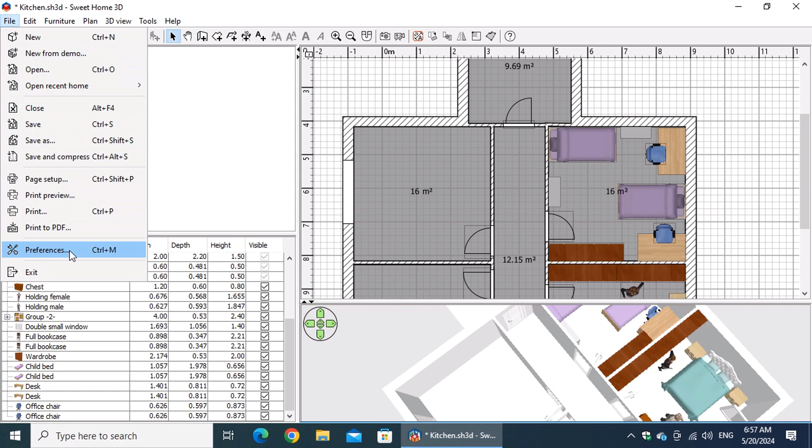In this lesson, we'll delve into the kitchen design created by Peter. Peter's vision is a kitchen space measuring 4 meters by 4 meters.

As we embark on the planning process, 2 key aspects will be our guiding light. We'll assess whether the 16 square meter space offers sufficient legroom to comfortably fit all the essential kitchen elements and allow for smooth movement within the kitchen.

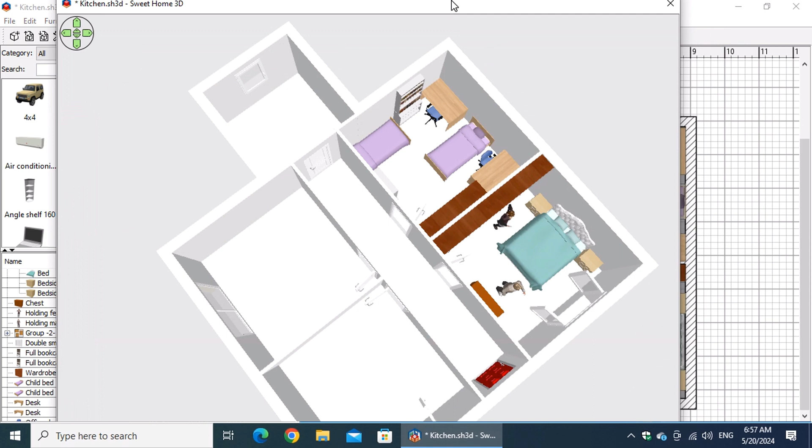We'll strategically place key appliances and fixtures like the oven hob, sink, dishwasher, and refrigerator. Choosing their specific locations is crucial, as it dictates the layout for plumbing and electrical installations. We'll also closely examine the ergonomics of the furniture layout, ensuring ample space for movement and food preparation.

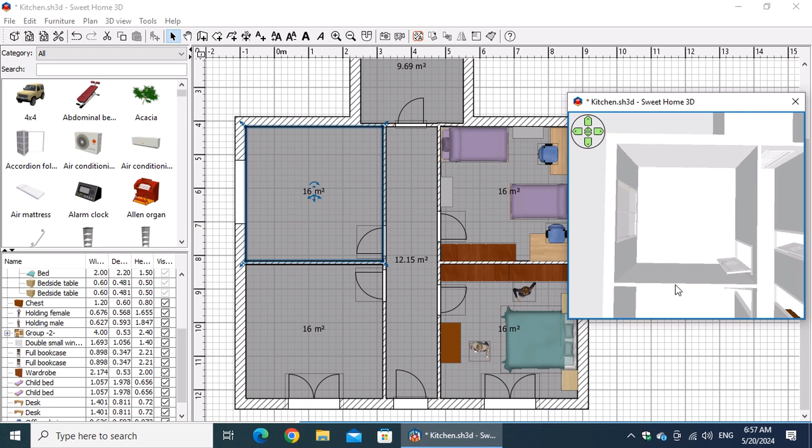By meticulously considering these important factors, we can design a kitchen that is not only functional but also enjoyable to use. If you downloaded the Creators Collection from the official Sweet Home 3D website as we explored in a previous lesson, you'll be greeted by a treasure trove of kitchen essentials. It goes far beyond just cabinets, ovens, and dishwashers.

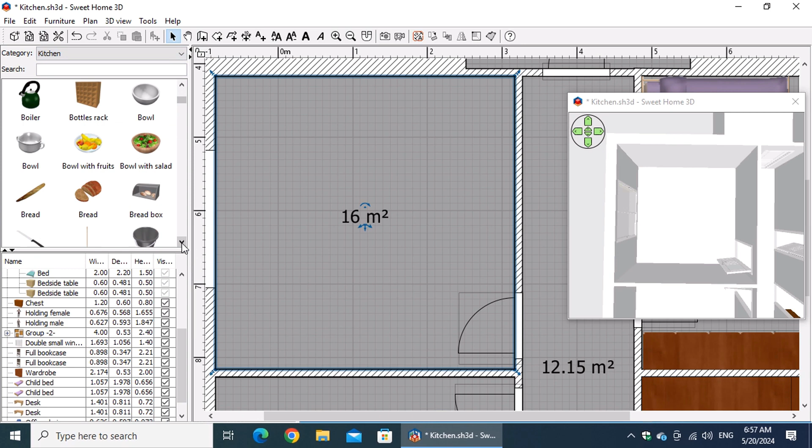Think of it as a virtual chef's paradise. You'll find everything you need to stock your digital kitchen, from essential tools like knives and pots to finishing touches - think forks, spoons, bread, and even mouth-watering pizzas and fries.

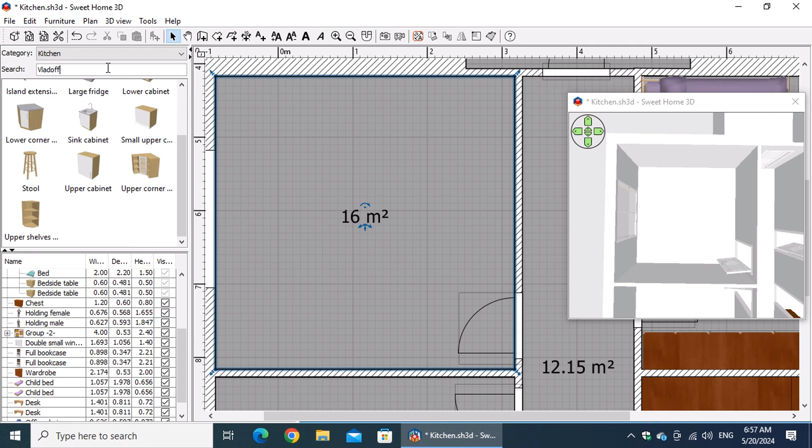To bring this to life in Sweet Home 3D, we'll strategically place furniture starting from the upper right corner. Before we begin, let's ensure that magnetism is enabled. First, we'll introduce the lower corner cabinet, followed by the upper corner cabinet, forming the foundation of the L shape.

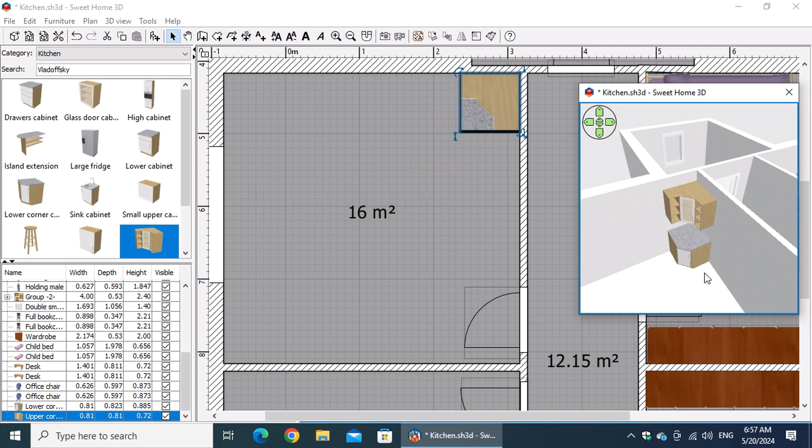We advance by positioning a lower cabinet atop the upper wall, earmarked for our built-in dishwasher. With a double click, we adjust its width to a fitting 45 centimeters. Continuing forward, we introduce 2 sink cabinets into the arrangement.

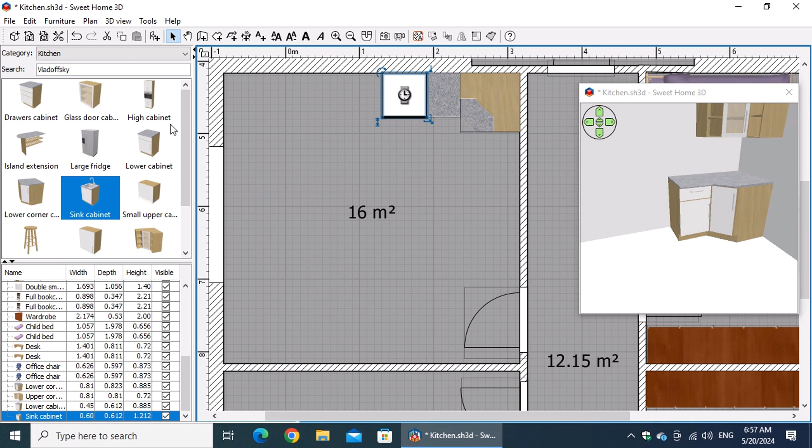Activating the Select Object in Plan button, we double-click on the left sink cabinet. In the Modify Furniture window, we choose Mirrored Shape and confirm by pressing OK.

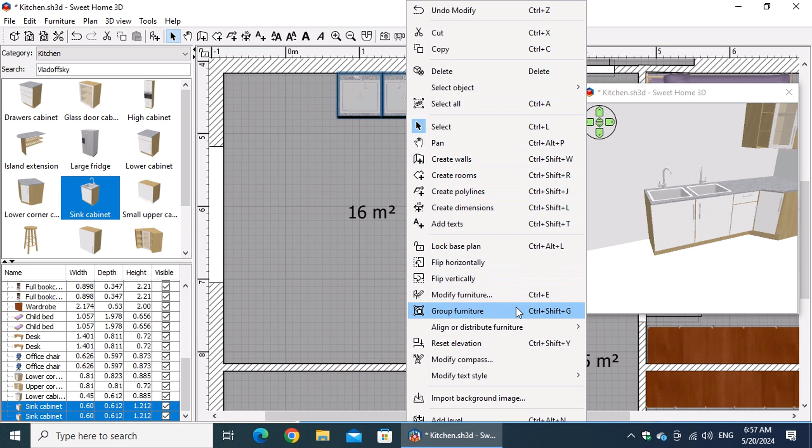Next, we select both sink cabinets, right-click on one, and opt for Group Furniture from the appearing menu. If necessary, we deselect any unwanted selections and then double-click on the grouped object. Finally, within the Modify Furniture window, we adjust the width to precisely 90 centimeters.

On the left side, we arrange a drawers cabinet, alongside a tall cabinet housing the oven at bench height. Elevating the oven to this level not only enhances accessibility, sparing users from bending or stooping, but also contributes to a unified and sleek aesthetic within the kitchen space.

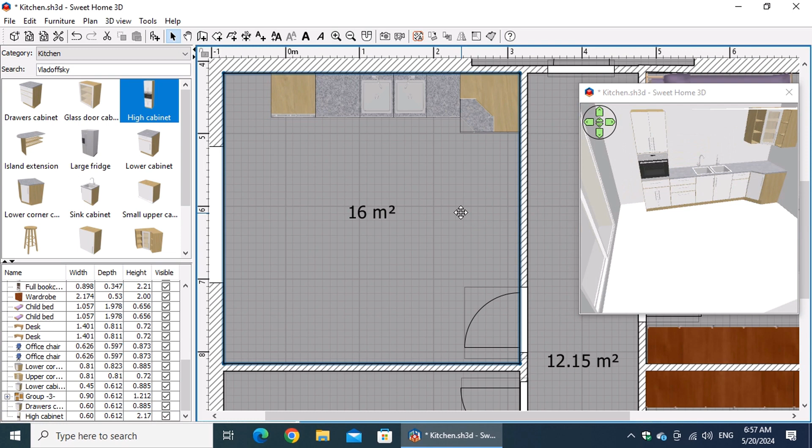This design choice not only prioritizes convenience but also fosters a harmonious integration, particularly when paired with other built-in appliances such as the dishwasher or refrigerator.

Let's continue by positioning the cabinets starting from the door side of the room. Place a drawers cabinet followed by a lower cabinet. Next, let's search for a fridge and position it at the far end of the right corner.

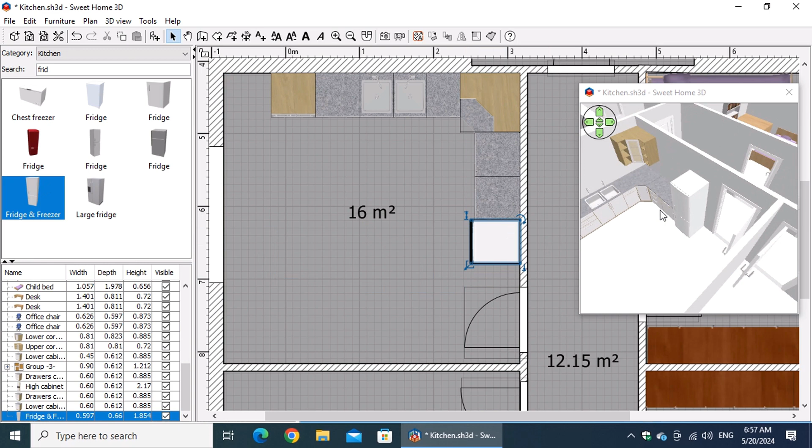To incorporate the upper cabinets, let's begin from the left corner. Position an upper cabinet, then double-click on it. In the Modify Furniture window, adjust the width to 45 centimeters. Once done, carefully position the cabinet on the left side of the corner.

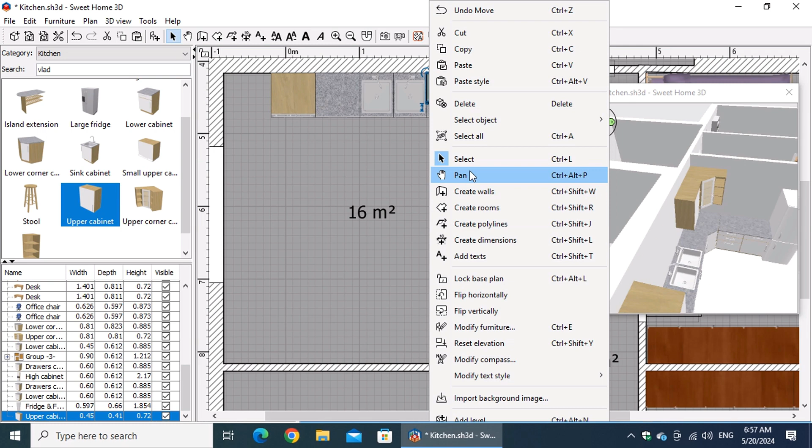Above the sink, we'll install 2 upper cabinets. Double-click on the right cabinet, and in the Modify Furniture window, select Mirrored Shape.

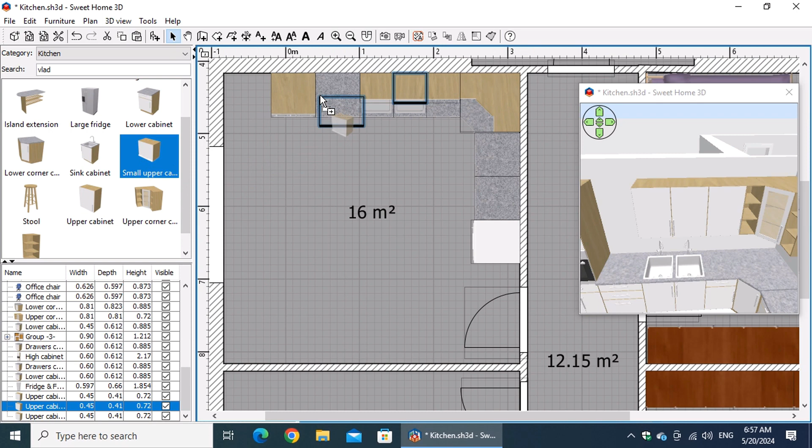Then, we'll add a small upper cabinet equipped with an extractor hood at its base. On the right side of the room, let's install 2 upper cabinets.

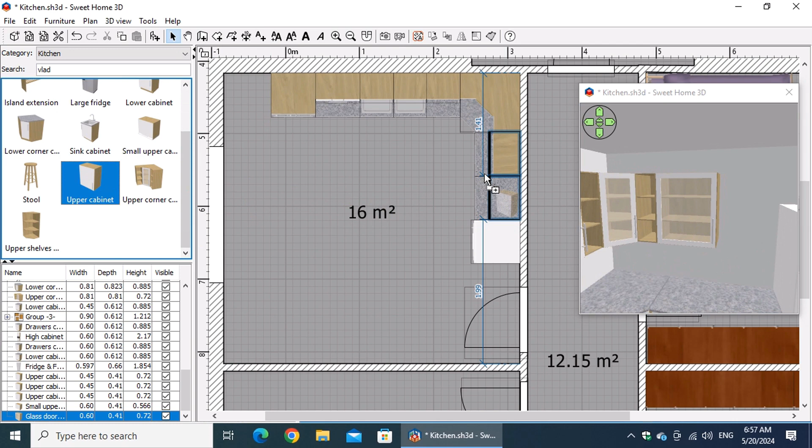In the search box, begin typing 'hob', then select the induction cooker. Place it on the right side of the oven, on the bench. The elevation of the induction cooker will automatically adjust to match the height of the bench.

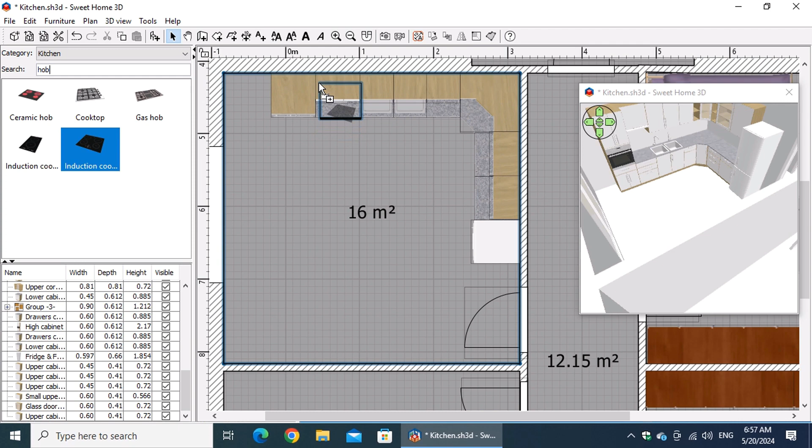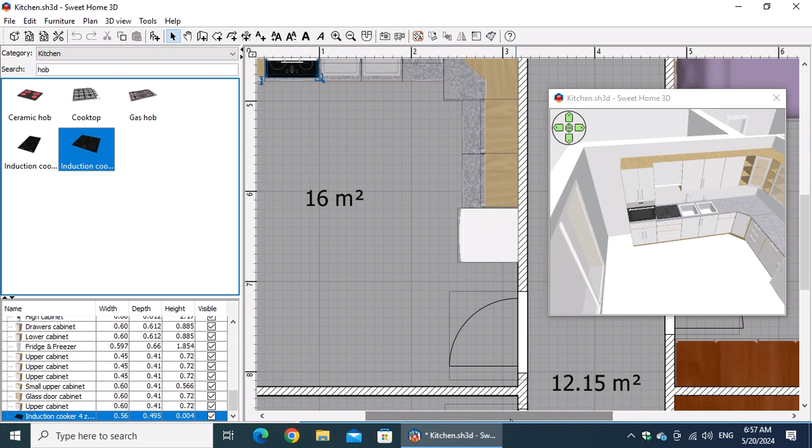While the kitchen design might not win any architectural awards, Sweet Home 3D empowers you to realize your own vision with precision. Despite this, it's evident that Peter's 16 square meter room provides ample space for a comfortable kitchen setup. With countless possible combinations, alternative placements of cabinets could optimize the arrangement of kitchen elements for improved ergonomics.

It's worth noting that kitchen ergonomics should be tailored to individual physical characteristics. For instance, for someone of NBA draft pick stature, an 88 cm high counter would hardly be considered ergonomic.

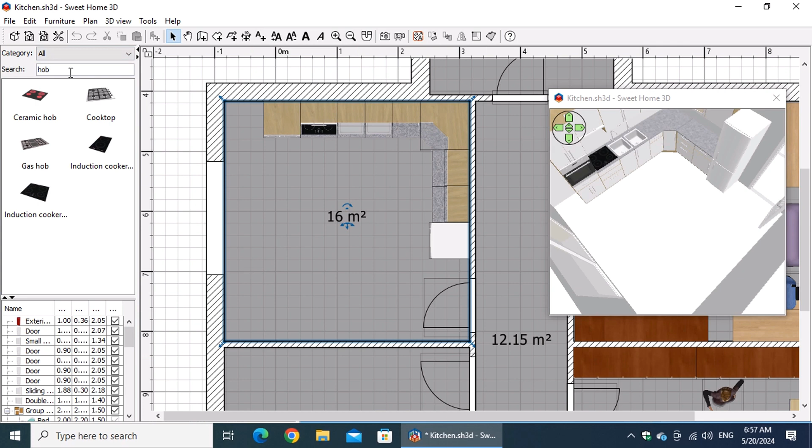Let's assess if there's sufficient space left for a dining area. In the category selection, choose All and begin typing 'dining' in the search box. Place the table in your desired position, then double-click on it to set its actual width and depth.

Next, start typing 'chair' and position the chairs around the table, simulating someone sitting, to truly test the space.

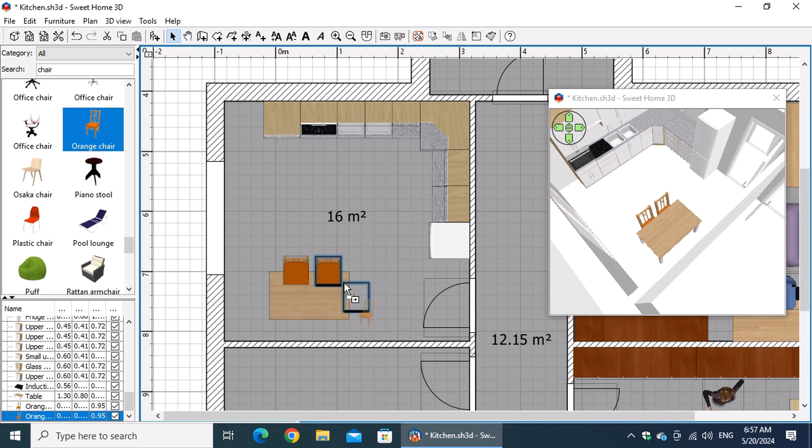Select all the chairs and the table by holding down the Shift key while clicking on each item. Right-click on one of the selected items, and from the menu that appears, choose Group Furniture. This allows us to easily reposition all the items together.

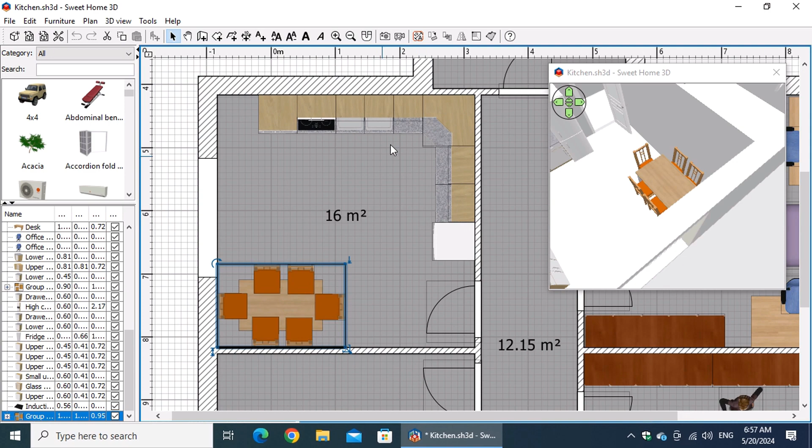Once more, Peter's design appears to fulfill the requisites, with both the kitchen and table fitting snugly within the available space. However, Monica's aspiration to introduce a kitchen island for increased storage, additional counter space, and a gathering spot for the family might challenge the functionality of Peter's layout.

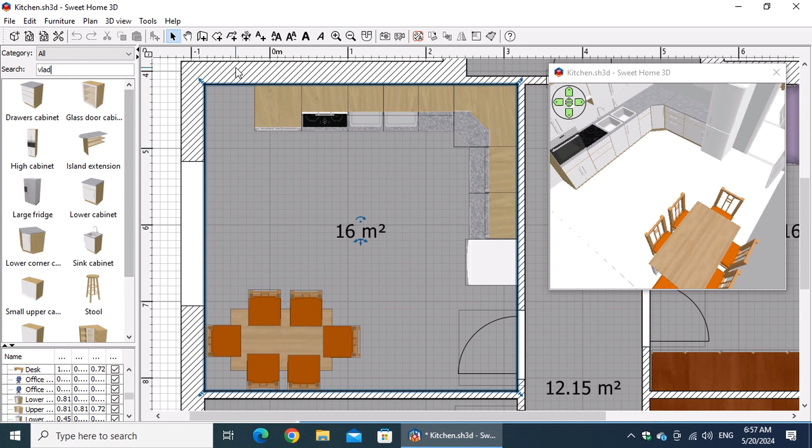Let's start typing 'Vlodovsky' again in the search box. The ideal distance of the kitchen island is between 1 meter 5 centimeters and 1 meter 20 centimeters from the kitchen cabinets. Let's create two dimension lines to indicate the distance.

Select the Create Dimensions button on the toolbar. Start the dimension line from the kitchen cabinet and move the mouse down. Press the Enter key to set accurately the distance of 1 meter 20 centimeters.

Let's once more select the Select Objects in Plan button on the toolbar. Note that if we position two kitchen cabinets in a row, their total length is 1 meter 20 centimeters. This isn't by chance. This distance is ideal for allowing the cupboard doors on both sides to open simultaneously while also providing ample space for comfortable movement.

Let's put the two cabinets in place and extend the island by inserting the island extension piece of furniture. In this case, it won't just be the portions that will be causing heartburn in the dining room, but also the island's awkward placement.

Let's test the distance of 1 meter 5 centimeters. Double-click on the dimension line, then adjust the distance between the endpoints to precisely 1 meter 5 centimeters.

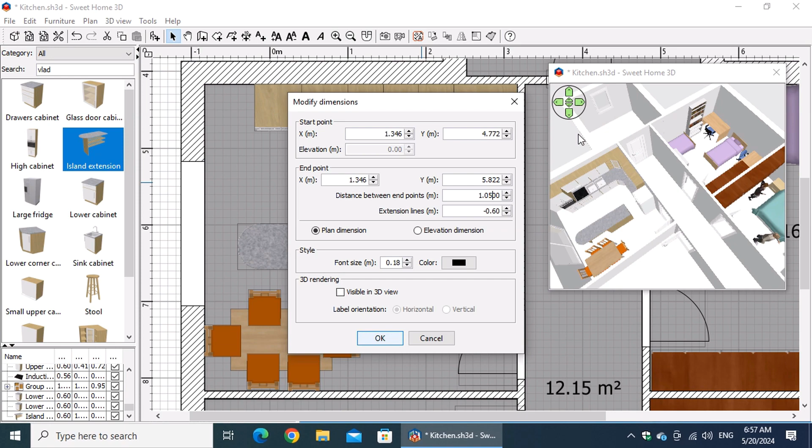Next, select the elements of the kitchen island by clicking on them while holding Shift. Finally, move the island to align with the end of the dimension line.

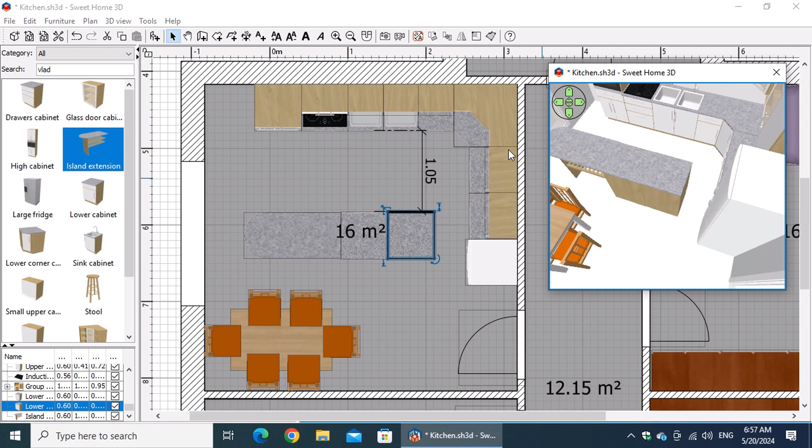However, this positioning poses challenges as it hinders the accessibility of the fridge and chest of drawers. Additionally, on the left side, the proximity of the balcony door to the kitchen island could potentially obstruct its opening, especially if it's not a sliding door.

Nevertheless, even digitally, Monica wants to see her dream and asks Peter to place some stools, move the kitchen stove to the island, and above it a hood.

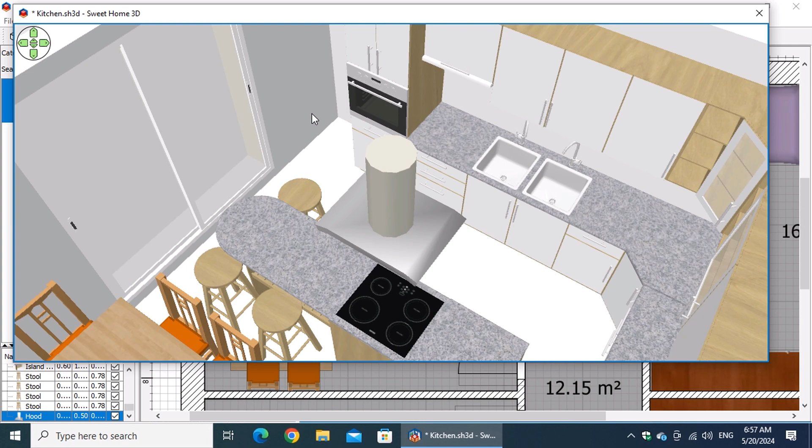After a delicious dinner, everyone migrates to the living room to relax, except for one unfortunate soul who is condemned to do the dishes.

In the next episode of 3D Logic Class, we'll escape the kitchen and enter the living room.